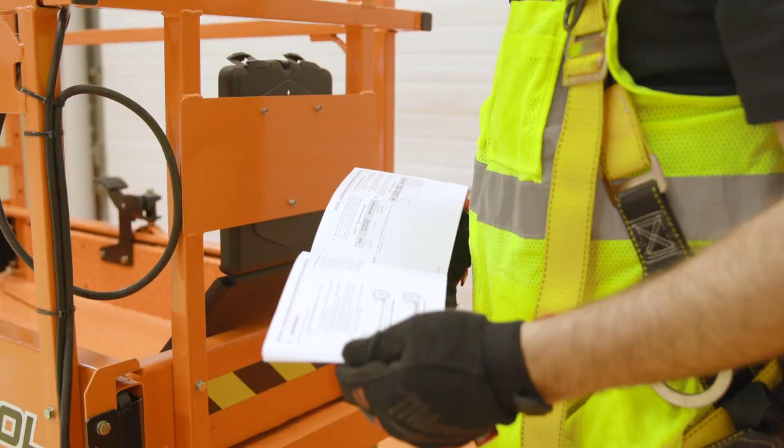Proper training is the first step towards qualifying an operator to operate any classification of MEWP equipment. When authorized by the user, self-familiarization can be achieved by a properly trained operator reading, understanding, and following the manufacturer's operation and safety manual. The user shall ensure the operator is familiarized on the following.

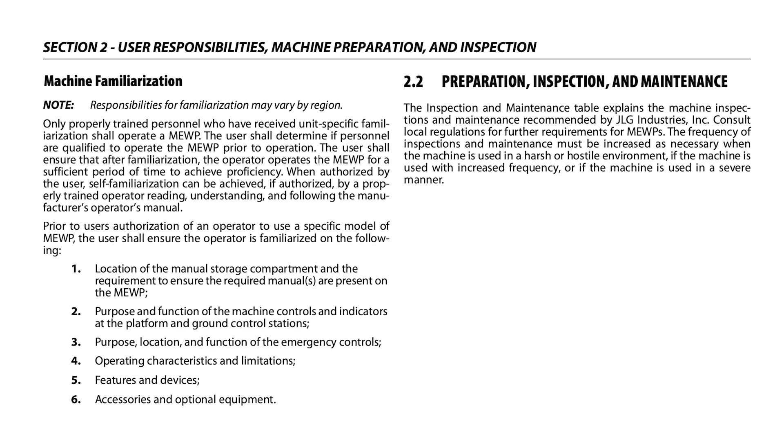Make sure a copy of the Operation and Safety Manual, AEM Safety Manual, and ANSI Manual of Responsibilities is enclosed in the weather-resistant manual storage container located inside the platform.

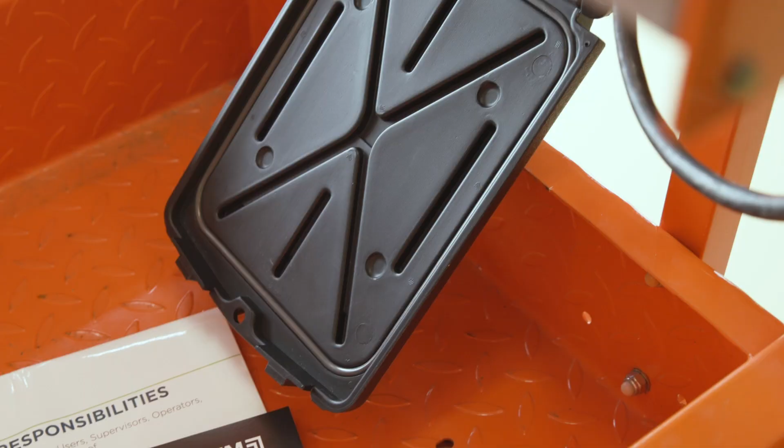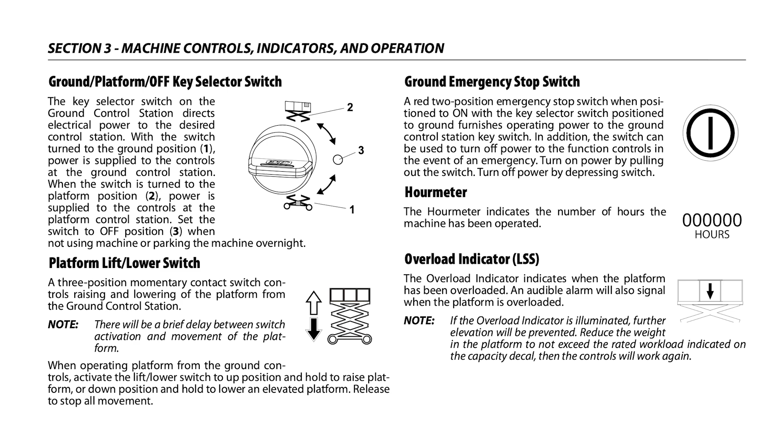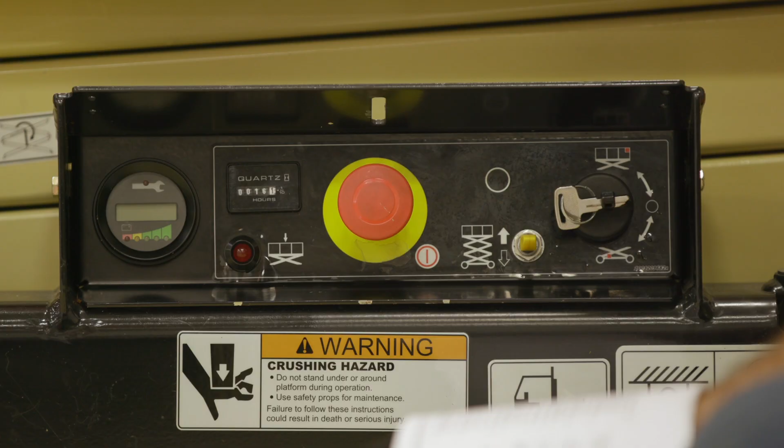The ground controls are located on the right side of the machine at the base frame. They consist of a 3-position key switch that selects between 3 modes: off, platform mode, and ground mode. The platform lift and lower switch controls raising and lowering the platform, the ground emergency stop switch turns off power to function controls, the hour meter indicates the number of hours the machine has been operated, the platform overload indicator illuminates when the platform is overloaded, and the multifunctional digital indicator, if equipped.

Reference Section 3 of your Operation and Safety Manual for an in-depth look at the MDI indicator or other machine controls. The platform controls are located on the right side of the machine's platform.

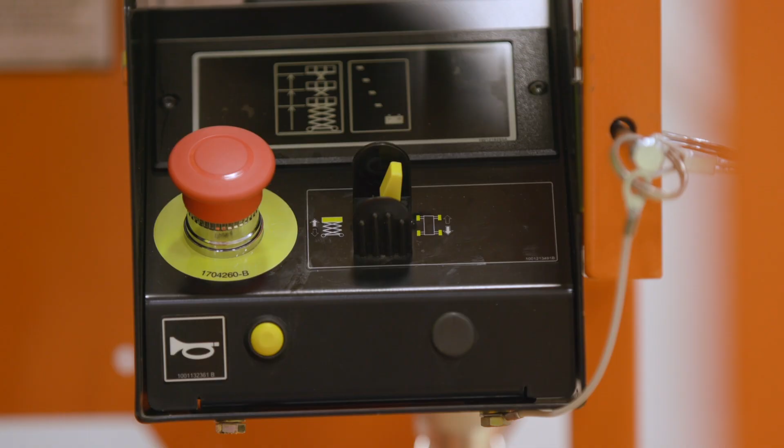They consist of an emergency stop switch, the lift drive selector switch, a button to sound the horn, forward, reverse, lift, lower, directional arrow. The drive, lift, steer joystick control controls the drive, lift, and steer functions.

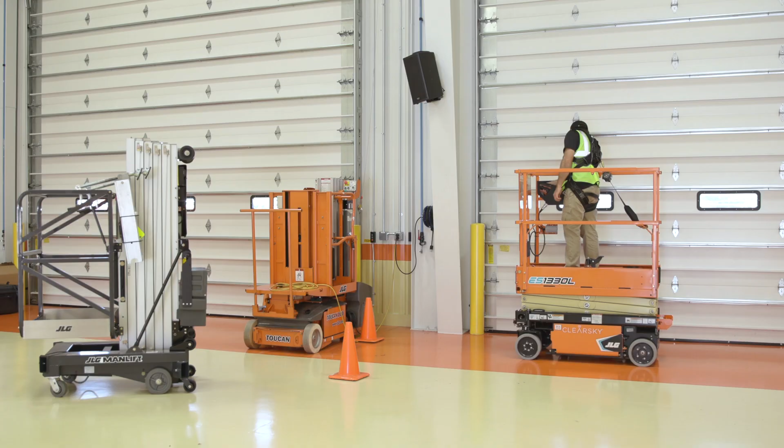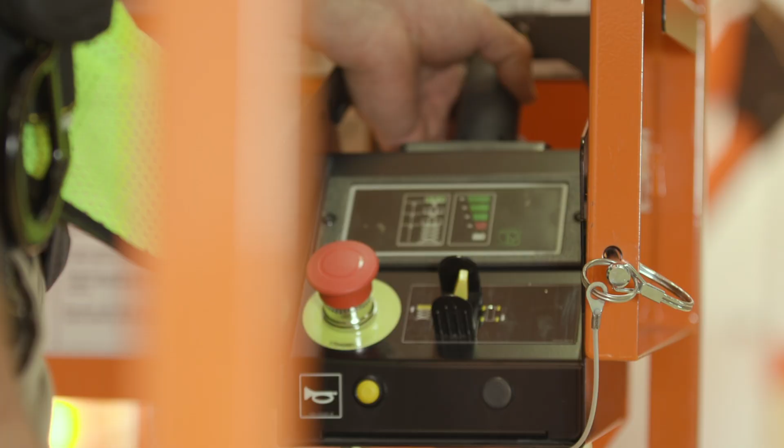The trigger enable switch is located on the front of the joystick controller. It acts as a function enable switch and must be depressed before operating the drive, steer, and lift functions. Joystick functions such as drive and lift are proportionally controlled. As you push or pull the joystick controller from its neutral position, the function's speed increases.

The steer switch is a thumb-operated switch. Depressing the switch to the left will steer left, and depressing the switch to the right will steer right.

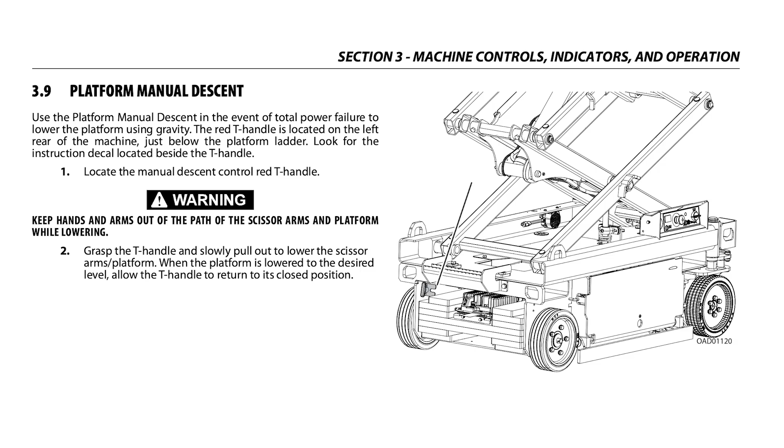The platform manual descent is located at the rear of the machine, just below the platform ladder. Grasp the red T-handle and slowly pull out to lower the scissor arms using gravity in the event of total power failure. Reference Section 4 of your Operation and Safety Manual for emergency procedures and steps to be taken in case of an emergency situation during operation.

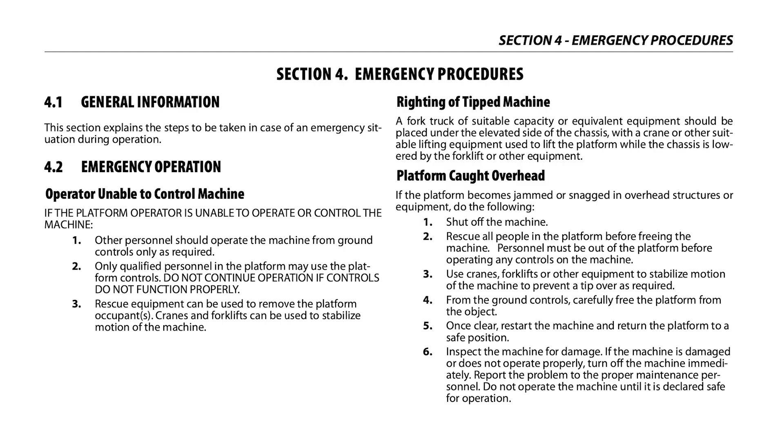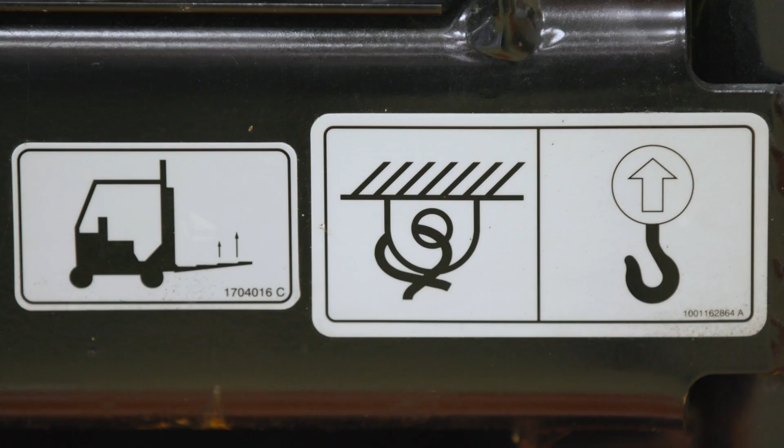Important points to remember during operation are provided at the control stations by danger, warning, caution, notice, and instruction placards. This information's express purpose is to alert personnel of potential hazards created by the operating characteristics and limitations of the machine. The capacity limitations of your machine are based on the following criteria.

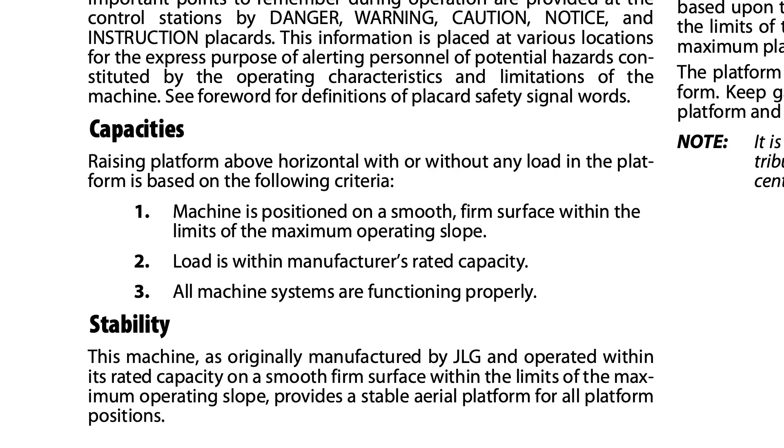The machine is positioned on a smooth and firm surface within the limits of the maximum operating slope. The load is within the manufacturer's rated capacity, and all machine systems are functioning properly, which can be established with a pre-start inspection. Reference Section 3.3 of your Operation and Safety Manual for a look at these operating characteristics and limitations.

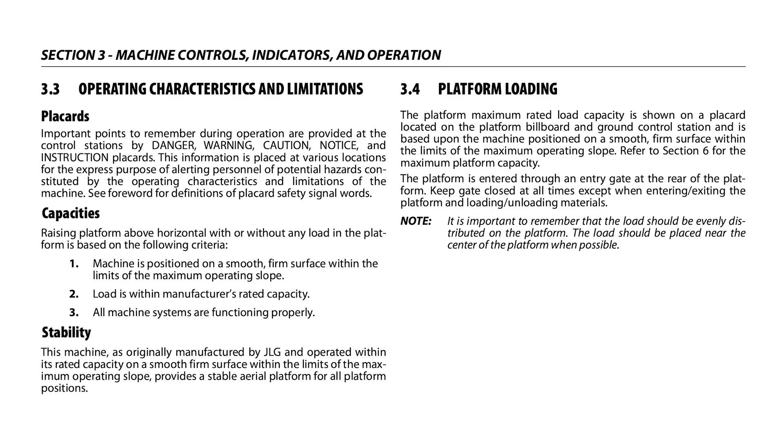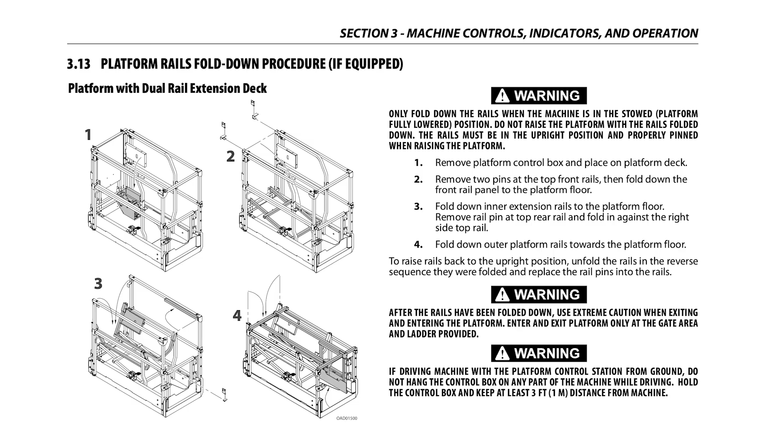Your machine may be equipped with fold-down rails to navigate through standard doorways. A step-by-step platform rails fold-down procedure can be referenced in Section 3.13 of your Operation and Safety Manual.

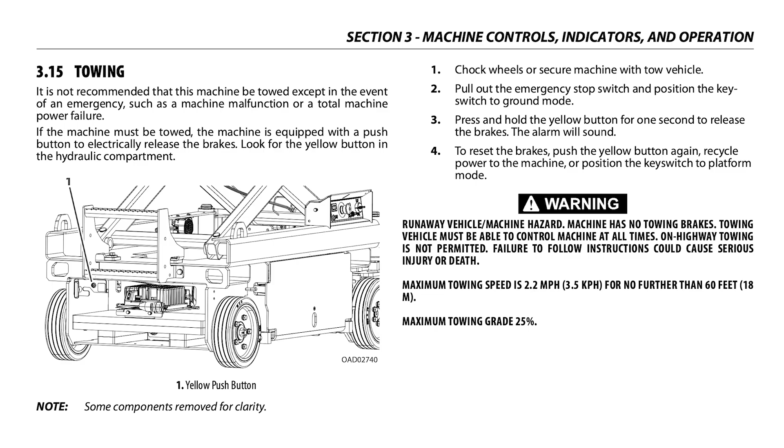It is not recommended that this machine be towed except in the event of an emergency, such as machine malfunction or total machine power failure. Before towing the machine, it is extremely important to reference the towing procedure outlined in Section 3.15 in your Operation and Safety Manual. The machine has built-in forklift pockets.

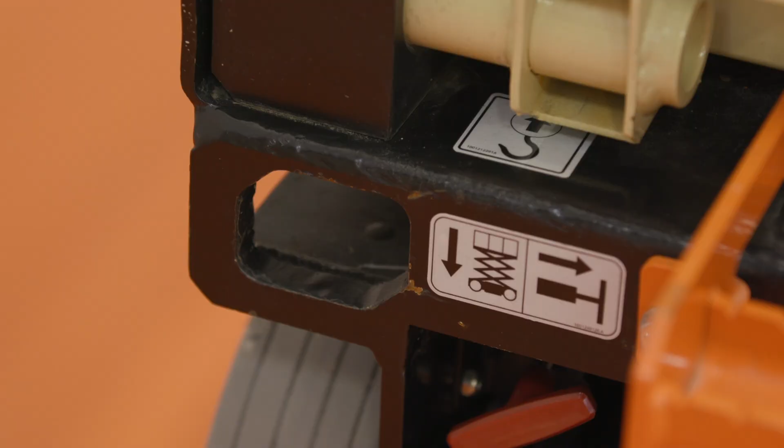Lift the machine only using these pockets, and only with the platform in the stowed position. The machine also has 2 lift lugs at the rear of the frame and 2 tie-down lift lugs at the front of the machine that are to be used when lifting the machine with a spreader bar and 4 equal length straps or chains capable of supporting the full gross weight of the machine.